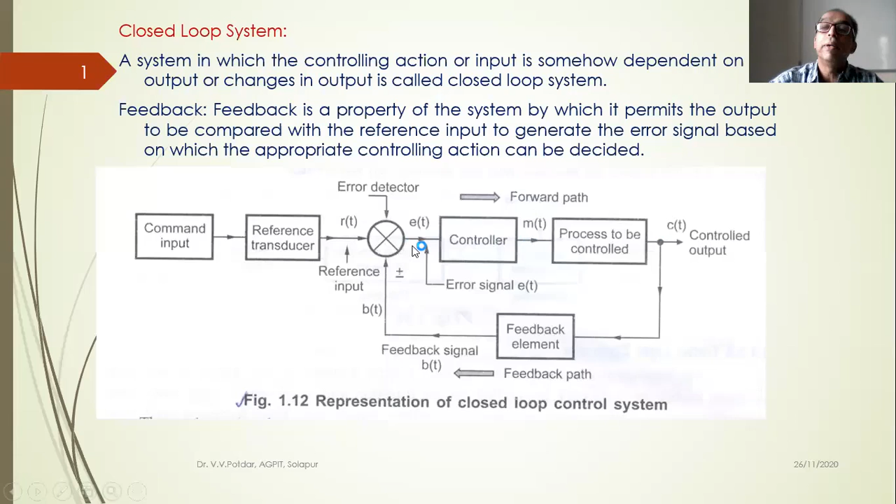And that's what this advantage says. It has got very high accuracy. It controls the output parameter so accurately because constantly it is monitoring and manipulating the actuating signal in such a way that the error in the system will be zero or the desired output is constantly maintained.

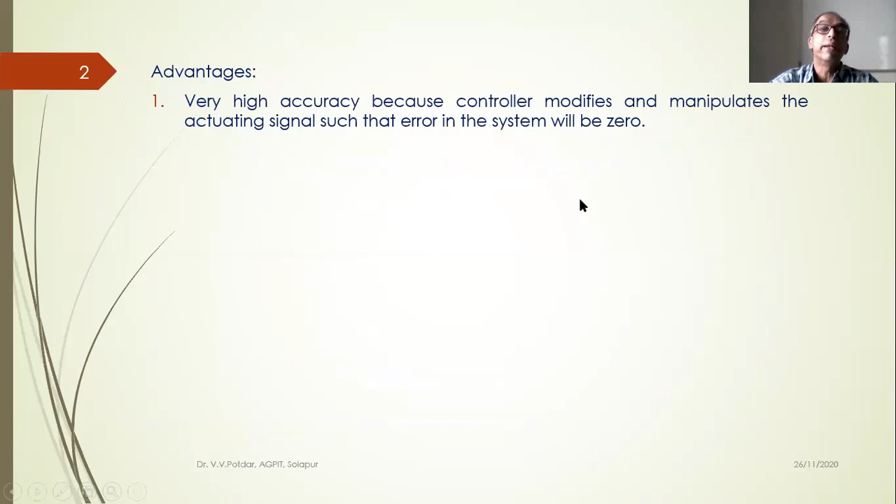It senses environmental changes also as internal disturbance and accordingly modifies the error. If you recollect, open loop systems don't have the ability to adapt to the environmental changes. As per the calibration, as per the timer set, it will keep on giving the output and controlling the output.

Okay, but in closed loop system, whether it is process oriented disturbance, whether in the furnace the door is opened and the temperature is dropping, it will automatically adjust the controller output so that the system parameter is maintained. But in addition to that, even if there are environmental changes, the ambient conditions have changed, your closed loop system will take care of that and accordingly modify the controller output so that the desired output

Okay. There is some disturbance. We'll try to eliminate that. Yeah. Somebody. Pradyumna, please mute yourself, please. There is some disturbance. Pradyumna, please mute your mic.

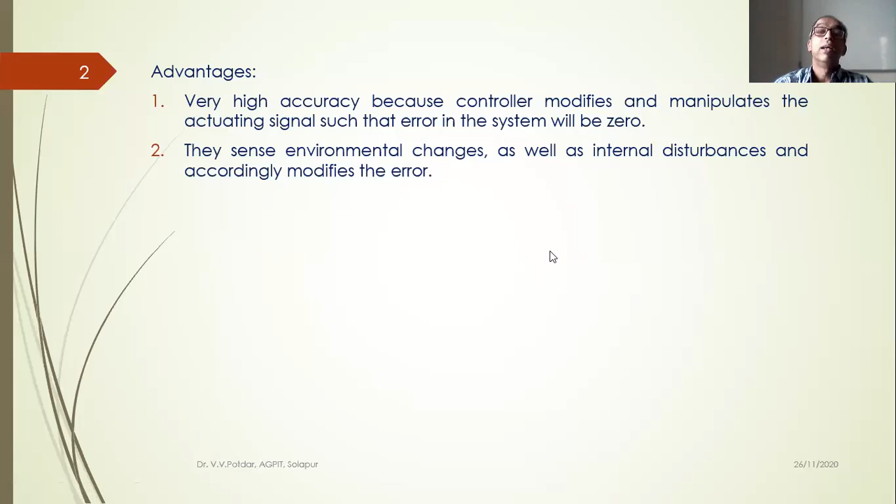Okay, so your closed loop systems sense the environmental changes, take it as an internal disturbance and accordingly modify the error signal and correcting signal. There is reduced effect of non-linearities and distortions. Now, this is also a very important aspect. Let us quickly discuss what is this non-linearity. In simple words, non-linearity is non-proportionality.

Now, what is this proportionality? What do I mean? If you have got a fan in a room and a regulator, when I turn the regulator clockwise slowly, it's nothing but a dimmer, a variable resistance device. When I rotate it clockwise, proportionately the fan speed is increasing, isn't it? So there is a linear relationship between this resistance change and the speed of the fan.

Now, if the resistance is stuck somewhere, there is no consistency in the resistance. The resistance values over some length are more or less. What will happen? I am rotating the knob by 30 degrees and I expect this much fan speed, right? And if I rotate it further and the fan speed starts reducing, or doesn't increase to the expected value, there is no proportionality between resistance change and fan speed. This is similar to a non-linear, non-proportional behavior.

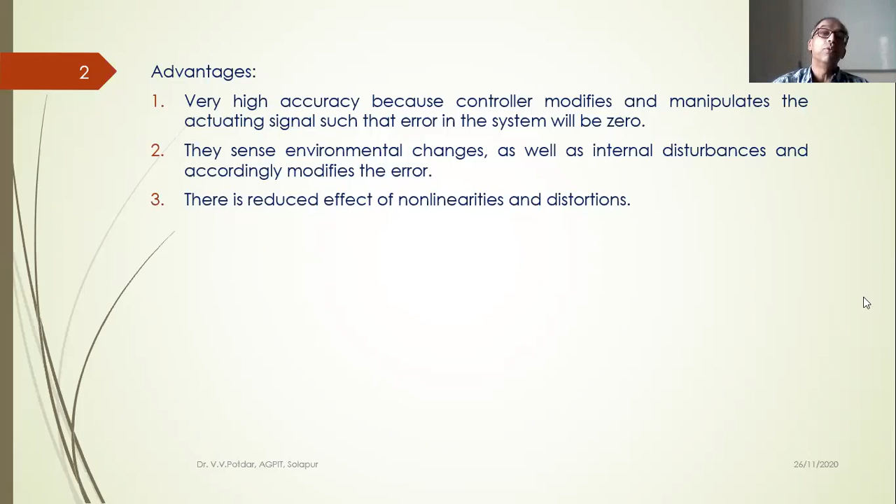Bandwidth of such system, or operating frequency zone. What is this bandwidth? Operating frequency zone for closed loop systems is very high, whereas for open loop systems it is very low. It does not work in a broad range. So bandwidth of such systems is very high. Operating frequency zone of the closed loop system is very high.

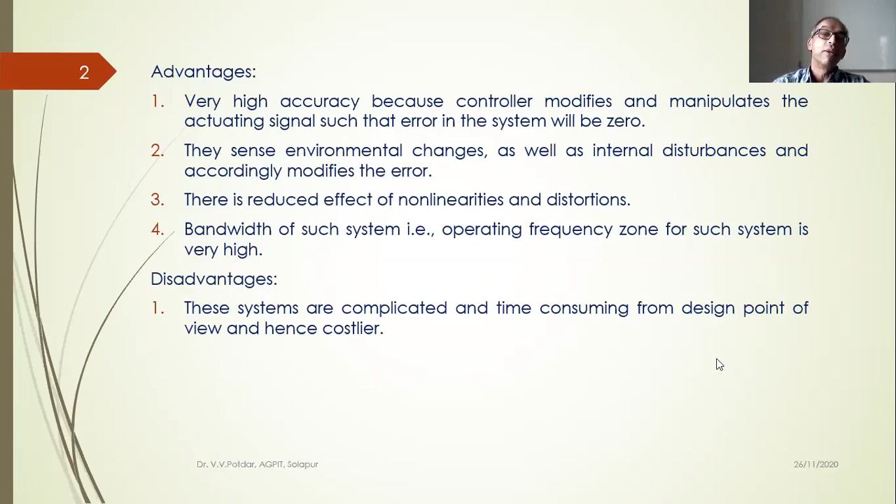Some disadvantages: these systems are complicated and time consuming from design point of view, and hence costlier. Due to feedback, the system tries to correct the error from time to time, and the tendency to overcorrect the error may cause oscillations. Now, last class we discussed this aspect, taking the classroom teaching as an example.

If I'm not taking any feedback in the classroom, I'm just delivering my lecture. The lecture runs smoothly, and the teacher also is least bothered whether the student has understood or not. And even the students don't bother whatever this teacher is telling. It is comfortably going. The lecture is going very nicely. I completed 40 odd lectures. Nobody has understood. I'm least bothered. It's an open loop system.

But if it is a closed loop system, I will constantly nudge you and ask you whether you understood it. I make you stand up: come on, answer me this. From teaching learning process point of view, it is good. But the entire harmony of the class, the entire stability of the class is disturbed to some extent. There are small stoppages in the lecture, but it is required. I do believe that the teaching learning process has to be feedback oriented.

But to some extent, maybe the teacher is not in good mood. He'll just try to overcorrect. Because of some reasons, that boy that you have made stand up is sincere, but on that day he was a bit disturbed. But because of the teacher's own mental state, he will just bang him and say, get out from my class. And so he tends to overcorrect. It's a crude example, but it should make you understand the concept of this overcorrection. And the system stability is disturbed. So this may cause oscillations in the system.

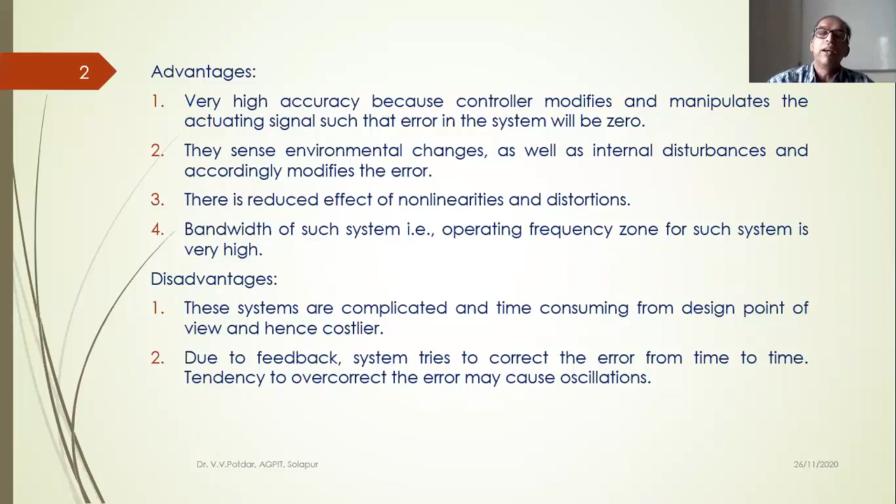Let us come back to our furnace control system case. The temperature has dropped inside a furnace, so the sensor will sense the temperature as a feedback signal, compare it with my set value of 1000 degrees, and it will try to correct. And because there is some time lag between the sensing signal and correction, it might so happen that there is overcorrection and the system temperature will keep on oscillating. If I set it for, let us say, 1000 degrees Celsius, it will keep on oscillating between 1050 and 950 because of this constant correction. So this is one of the drawbacks of feedback control system.

So let us go to the applications. We have already seen some applications. Human being is the best example of feedback control system. Suppose I want to write something on the board. My brain makes a decision. My brain is a controller, and hands are my actuators. I go to the board and write something, and my eyes work as feedback.

Instead of writing on a wall, I write on the board properly, because if my brain has given me a signal, I'll just move towards the board, and instead of writing on the board, maybe I'm writing on the wall. So my eyes sense that signal and the brain gives the correcting signal: no, move towards left or right. So this is one of the examples. The desired position of the hands is compared with the feedback signal from the eyes in the brain itself, and the brain takes a corrective decision and sends a signal through your neuromotor system to the hands, and you move your hand as per your requirement.

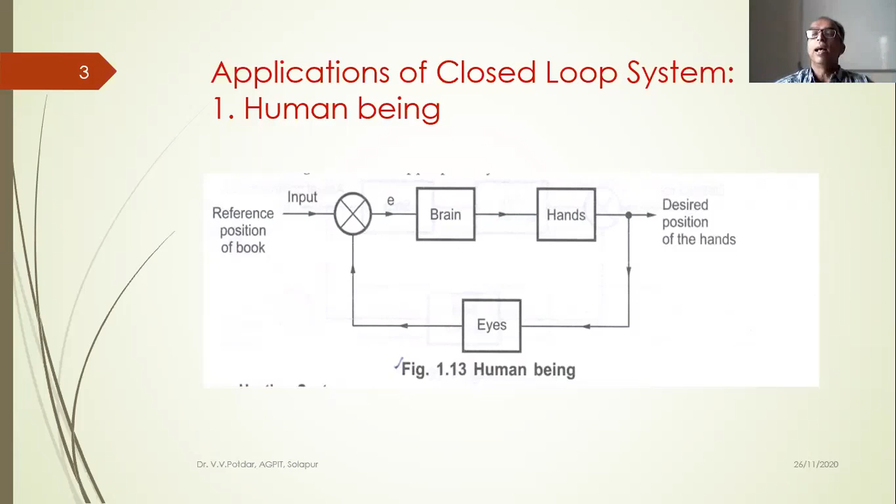So like that, human being is the best example. Initially, I told you it has got a temperature control system, a breathing control system, a digestive control system, and most of the human body control systems are autonomous and closed loop control systems, and that's why the whole universe is working in harmony. The human body is the best example of closed loop control system or feedback control system.

A second example, home heating system, though it is relevant to Western countries, if it is heated by maybe flue gases, let us say, or maybe steam.

So you have got a heating system as a system. So house temperature is sensed, and it is to be maintained at 25 degrees Celsius. That is my desired output. Desired temperature is 25 degrees Celsius. Actual temperature, let us say, as presently sensed by the temperature sensor is maybe 15 degrees Celsius. So 15 degrees Celsius will be compared with the set value of 25 degrees Celsius. So error of 10 degrees Celsius.

So accordingly, the error signal will be generated, and the valve will be actuated accordingly, and more steam or maybe flue gases or hot air will be allowed inside the room, and this room will be heated by this hot air till the temperature becomes 25 degrees Celsius. So this is one more example of a feedback control system or closed loop control system.

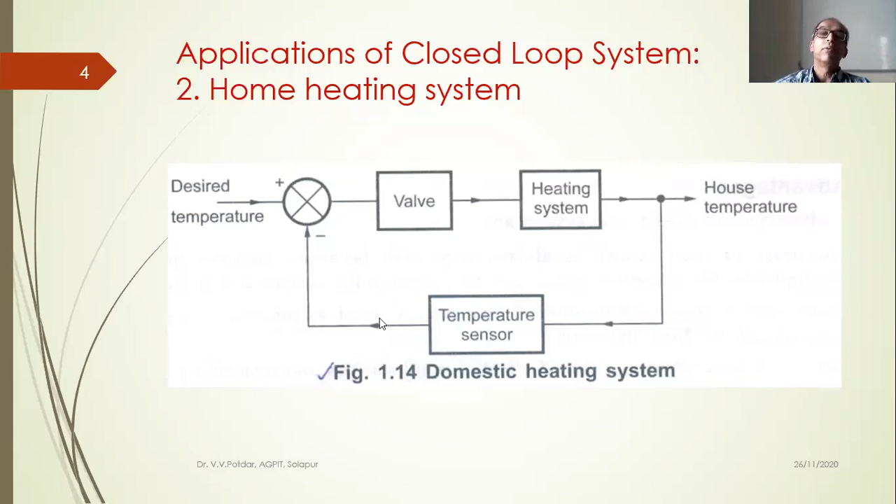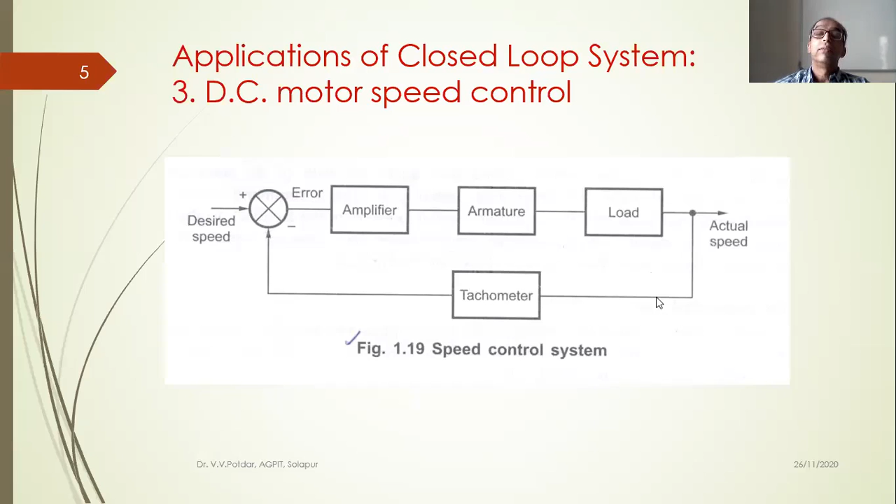Whatever is the error, that error will be suitably modified, altered, manipulated so as to suit the actuators. Okay, so the control unit will make a decision regarding the corrective action, and corrective action will be taken by the actuators, and the process parameters will be controlled. So these are a few basic elements.

In the next class, we'll try to understand each of these elements in a bit of detail, and then for a given actual physical system, we'll try to identify what are the functional elements, what are the functional control elements, what are the functional correcting elements, what are the functional system or process elements, what is the functional reference input element, what is the functional controlled variable, what is the functional feedback element or measuring device. This we'll discuss in the next class.